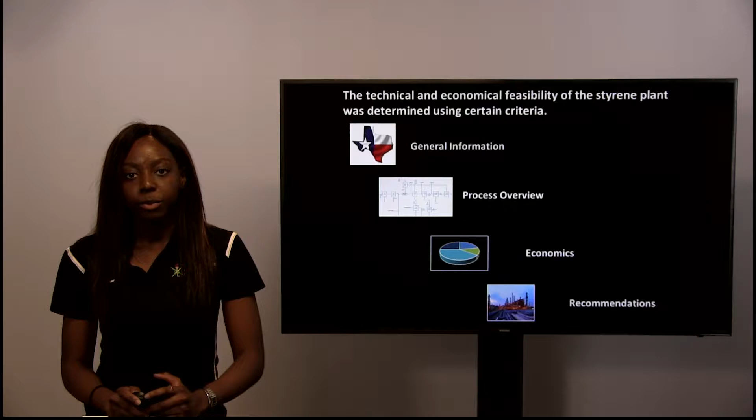They'll also cover a high-level overview of the production process, an economic analysis indicating the feasibility of the plant, and some recommendations about whether or not we should go forward with this project.

Our company, Knitline Chemicals, has 3 major locations across the United States. The first one is in Philadelphia, Pennsylvania. The second one is in University Park, Pennsylvania, which is actually the R&D facility that my team and I have been working from to develop the styrene plant for the final location in Houston, Texas.

What is great about this Houston, Texas facility is that it has access to many pipelines to supply raw materials and also to possibly transport some of our products.

In addition to this, the Houston facility would also be producing C4s as a major byproduct from another process.

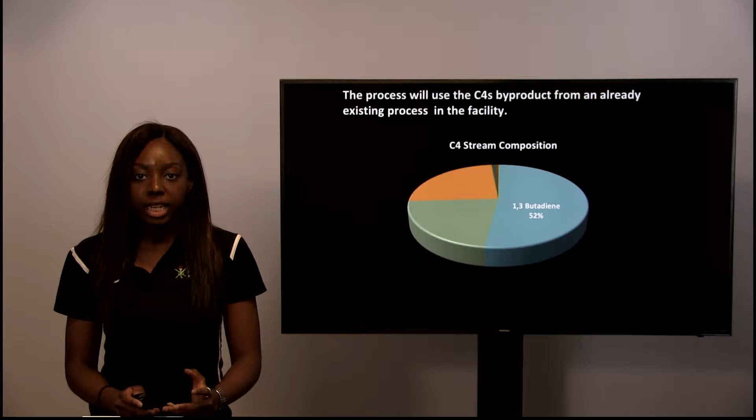This C4s is composed of over 52% 1,3-butadiene, which is essentially the major raw material for our styrene process.

Now, based on our calculations and designs that my teammates would discuss further, our plant will produce styrene at a capacity of 974 million pounds per year.

This would have a purity of 99.9%, which exceeds the market demands of 99.8%.

We will also be producing benzoic acid as a byproduct at a capacity of 26 million pounds per year. This can be sold in the market at 63 cents per pound.

Another of our byproducts would be fuel gas, which will be produced at 1,421 million pounds per year and will also be sold in the market.

Our final byproduct would be fuel oil. However, this byproduct would not be sold in the market, but it will instead be used as a utility to heat other processes in the plant.

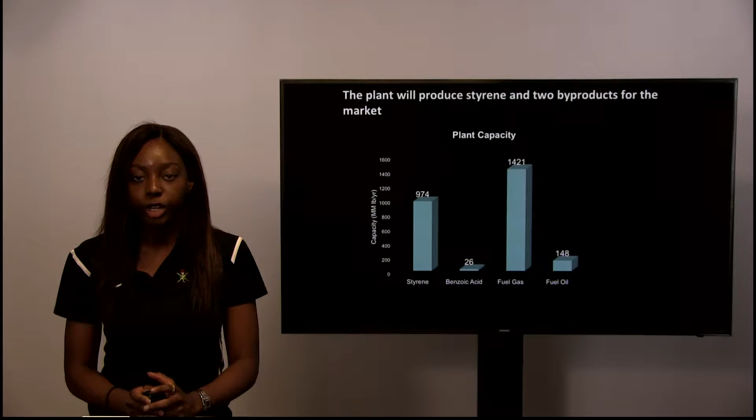For benzoic acid, we will be able to produce it at 99.7% purity, which meets the hard spec for that product as well, so this can be sold as a secondary product along with styrene.

Other hard specs we met were safety related. The first being the oxygen purity in our process was kept below 60% of the flammability limit, which meets the company standard.

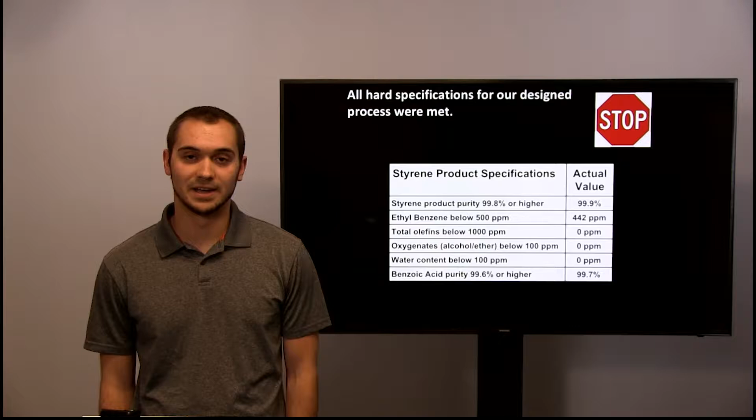The styrene product storage unit was also kept below 50 degrees Fahrenheit to avoid any kind of exothermic polymerization reactions.

There were 3 main soft specs that we did not meet with our design. Each one that we didn't meet was directly related to the waste streams in our process.

The overall selectivity of the process and the waste of VCHX and styrene did not meet the spec because of the high percentage of those compounds in the waste streams.

Ethylbenzene and styrene are 2 chemicals that are very difficult to separate, so in order to meet the hard spec of 500 ppm of ethylbenzene and the product purity of styrene, a pretty significant loss of styrene was incurred on the styrene purification towers.

Also, the production of byproducts such as benzoic acid and ethylbenzene takes away from the overall conversion to styrene.

Another soft spec that we didn't meet was the overall energy usage of our distillation columns.

The water purification tower that we had in our process uses 11,000 BTUs per pound of styrene product to run. This tower was needed in order to purify the water to avoid cooling water costs as well as wastewater treatment costs.

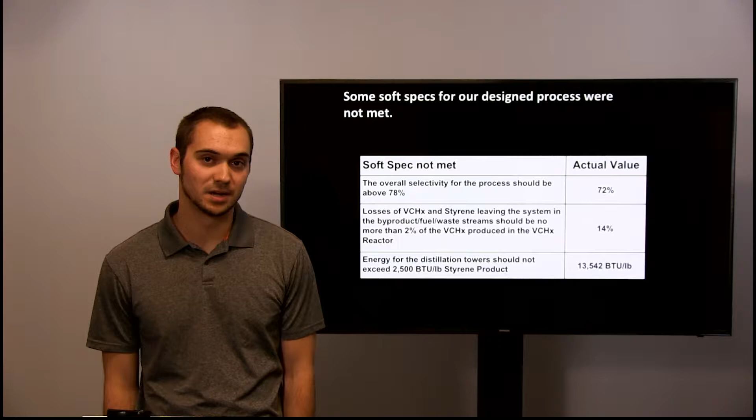For the environmental impact of our process, we considered 4 main waste streams: fuel oil, fuel gas, low BTU value flare gas, and water vapor.

The fuel oil is just a very flammable liquid at atmospheric conditions that we completely burned in all of our reboilers. The fuel gas was also used for fuel, but also sold as a major part of our revenue.

The flare gas was combined with excess process oxygen to make sure that the contaminants were completely combusted in the flare.

Overall, our process should not have a very large impact on the environment.

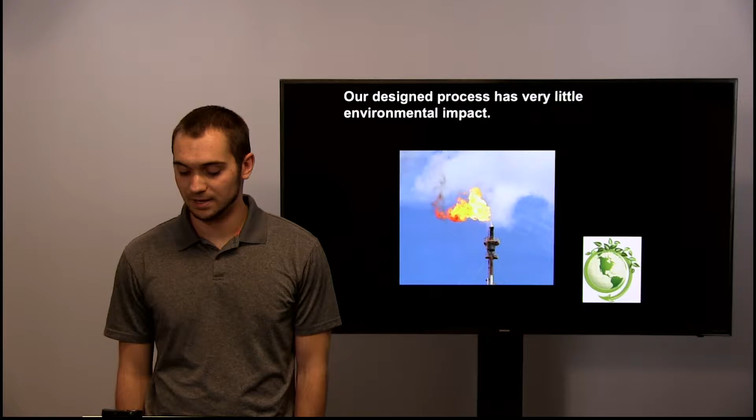Here you can see the first reactor takes the 1,3-butadiene and converts it into vinyl cyclohexene, or VCHX.

From there, the VCHX is purified using 2 columns, and then that VCHX is fed into the second reactor to create the styrene product.

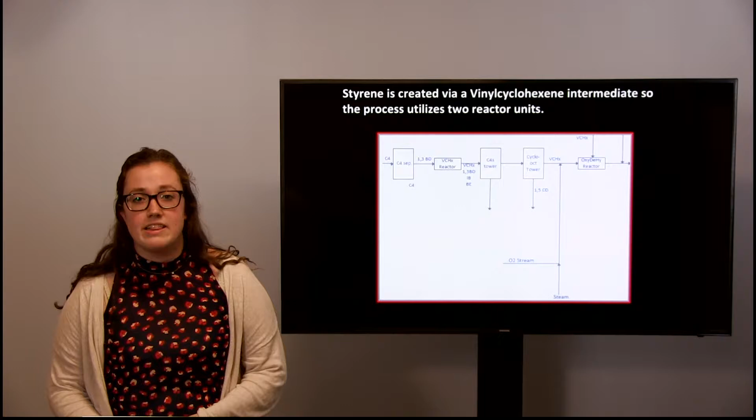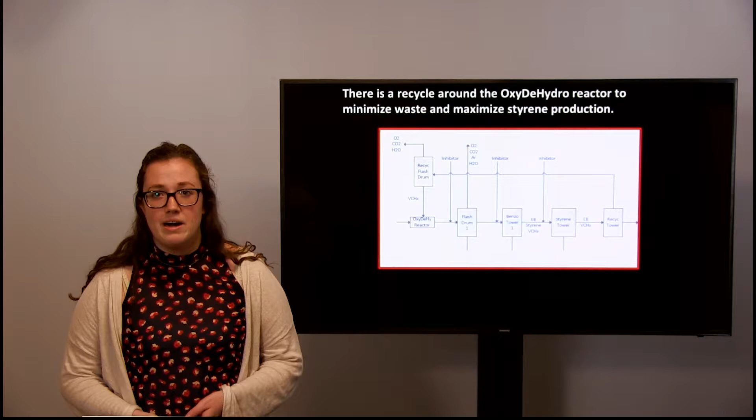The next area I'm going to highlight is the recycle around the second reactor. Here you can see there's a series of towers and a flash drum after the second reactor, and the final tower in this series purifies the VCHX to the point that it can be fed into a flash drum, purifies it more, and then it is fed into the second reactor. This allows us to significantly increase our production of styrene by nearly 9,000 pounds per hour.

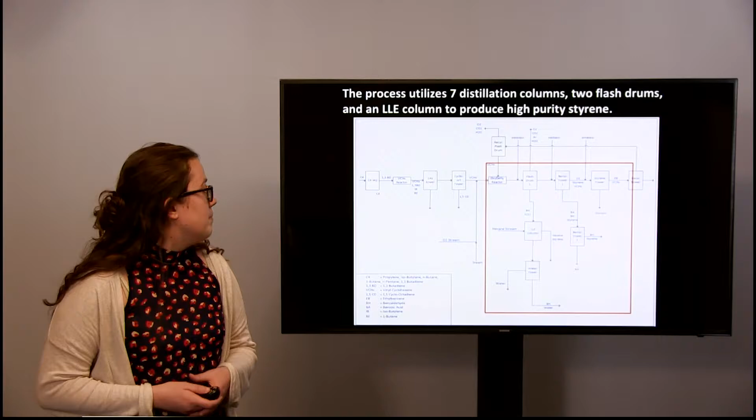Finally, the last section I'm going to highlight is the bottom half of the BFD. This allows us to purify our water stream to the point where it can be vented into the atmosphere, which greatly reduces our operating cost. This is done by using the LLE column seen and the distillation column labeled water tower.

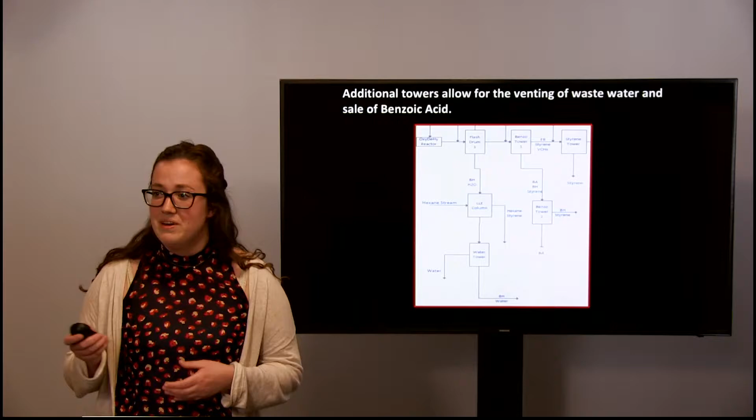And finally, you can see on this slide benzo towers 1 and 2. This allows us to purify benzoic acid to the point that it is pure enough to sell as an additional product. And now I'm going to pass it off to Margot to talk about economics.

The total capital cost of our plant is $457.75 million. These costs are split between the OBL, IBL, package distillation, and miscellaneous costs. Miscellaneous costs are comprised of things such as spare parts, team costs, contingency, etc.

What you're seeing here is basically a pie chart that shows the different distributions of costs between our different contributions. So the largest, obviously, is our package distillation, which was about 56%. This was greater than all 3 of the other categories combined. That shows that we have a pretty large cost with our package distillation, which wasn't something that could be neglected, because this could be something that we could end up designing, and that will be something that we will discuss later in our recommendations.

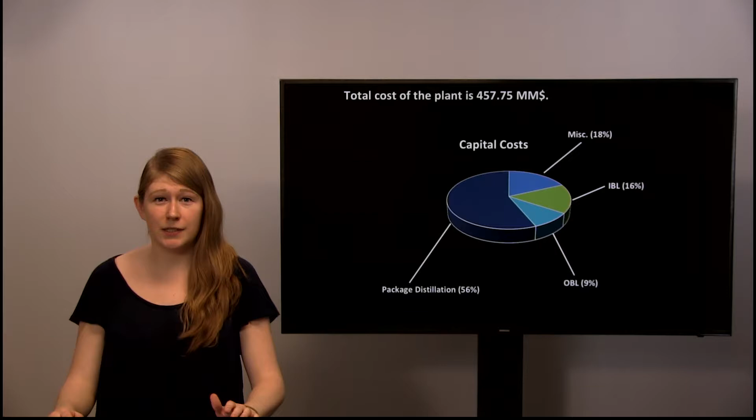Now I'm going to discuss in more detail the IBL and OBL costs. So the IBL costs for our plant, which consists of capital costs of equipment within battery limit, were $74.08 million. Much of the cost came from distillation towers.

As you can see in this pie chart, this is the largest cost right there. The reason why this cost was so large was because we had a pretty high flow rate, and a lot of our towers needed to be heated to very high temperatures. So it just required our towers to be a little bit bigger, and that ended up increasing our capital costs. The next largest would be the reactors, and then finally followed by our water recycle. These costs won't really change too much because it's something we can't really change about our process.

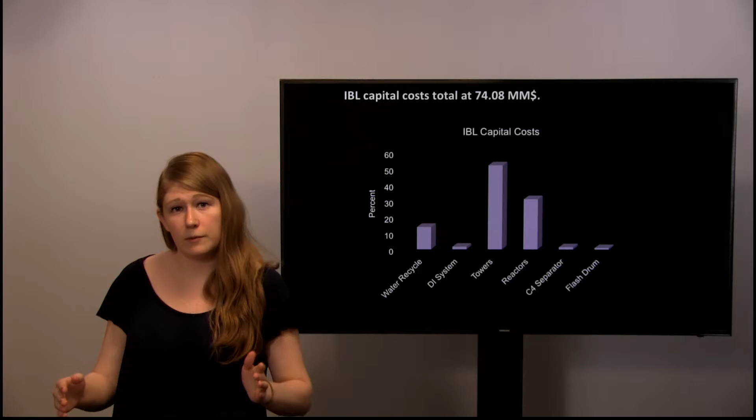So now that I've talked about IBL, I'm going to go a little bit further into the OBL costs. OBL generally includes product storage, utilities, and site development. These are capital costs of things that are outside the battery limit.

So the OBL cost for our plant was $42.78 million. The biggest cost for our OBL, which you can see on this pie chart, was our cooling water system, otherwise labeled a CT upgrade. The reason why this cost is so large is because we're using a ton of water throughout our plant to cool down a lot of streams. It's used in most of our heat exchangers, so it ended up being a pretty large cost.

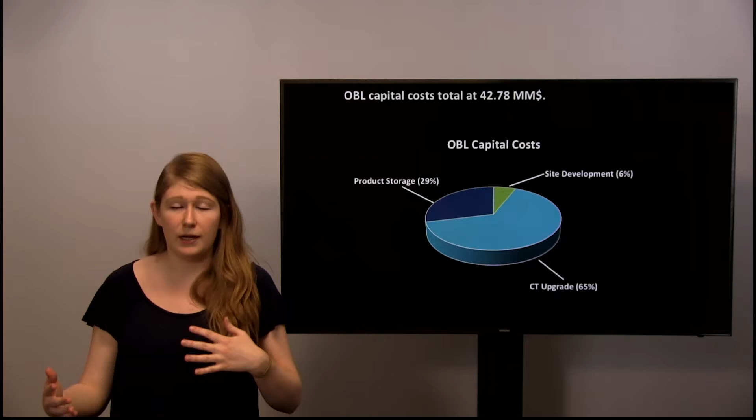The following largest would be our product storage, and this one is also fairly large because we have a pretty large flow rate of styrene that we need to send out to the OBL and end up storing. So now that I've talked a little bit about capital costs, I'm going to go into the costs that we have to pay all the time, which are our ongoing costs for our plant to operate properly.

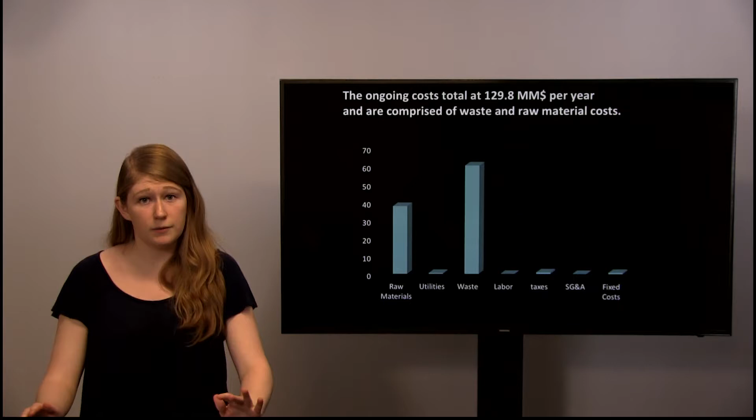Our ongoing costs include things such as waste, labor, raw materials, utilities, taxes, and other features which support the operation of the plant. Currently our waste and our raw materials are the highest contributors to our ongoing costs. The waste cost was around 60% and the raw material was around 38%.

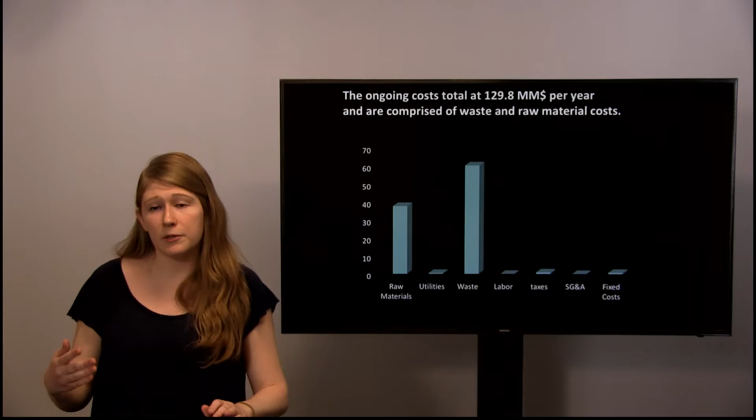Unfortunately, when we submitted our documents, there was actually an error in our calculation where our wastewater was entered in per year rather than per hour, so it ended up giving us this really large waste cost. So the next slide that I'm going to show is the corrected cost. Basically what we did was we corrected that per year into a per hour, and so I'm going to show what those costs are now.

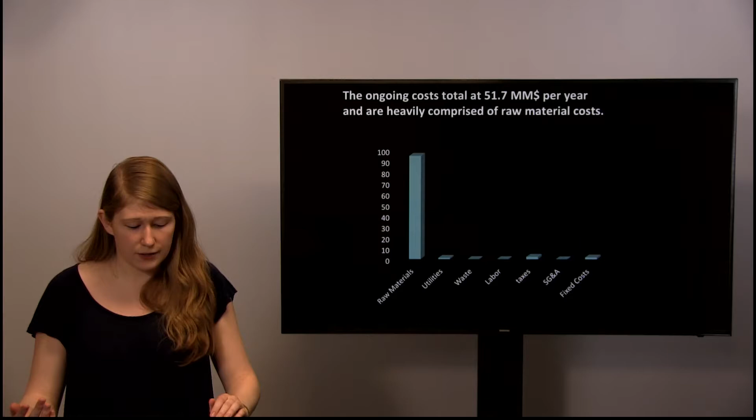Our ongoing costs are more likely around $51.7 million per year, and it's basically due to our raw material costs. It's followed by our fixed costs and taxes, but they're pretty negligible compared to the raw material costs, which you can see up on the board.

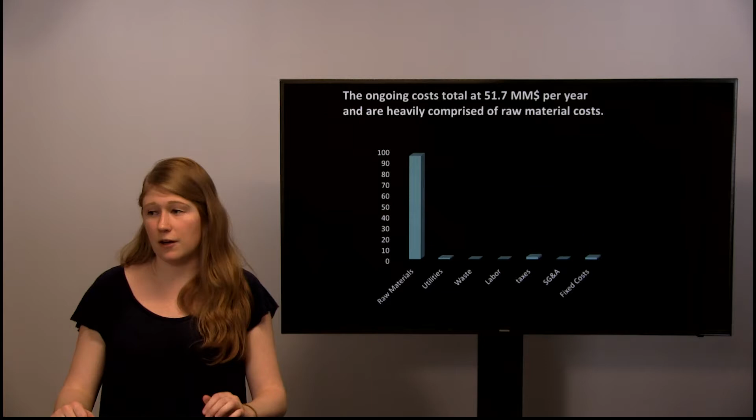From now on, whenever we mention our original design, that refers to the original documentations that were submitted and the original calculations. Any 'corrected' refers to when we fixed that calculation error. Now I'm going to hand it off to Paul, who's going to talk more about our cash flows and ATROR.

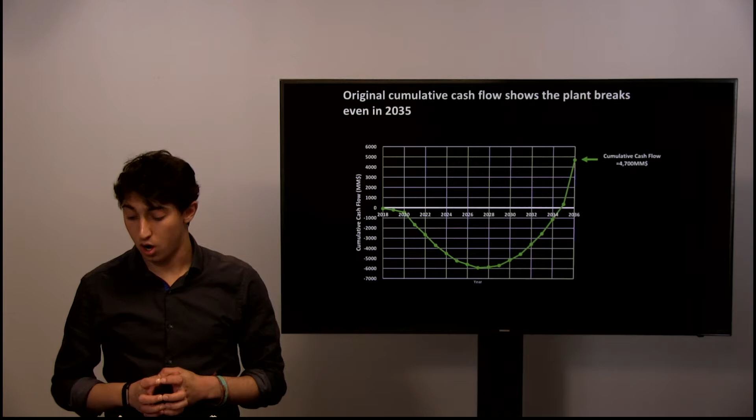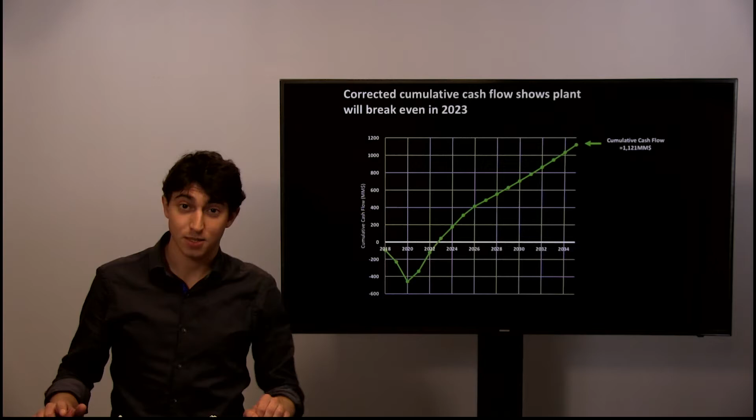Moving on to our ATROR and our original and corrected present worth. We originally calculated our ATROR to be 5.3%, which is much below the 20% ATROR that competing projects Nitline Chemicals is considering are currently at. And we expected to have a negative present worth of around $1.5 billion.

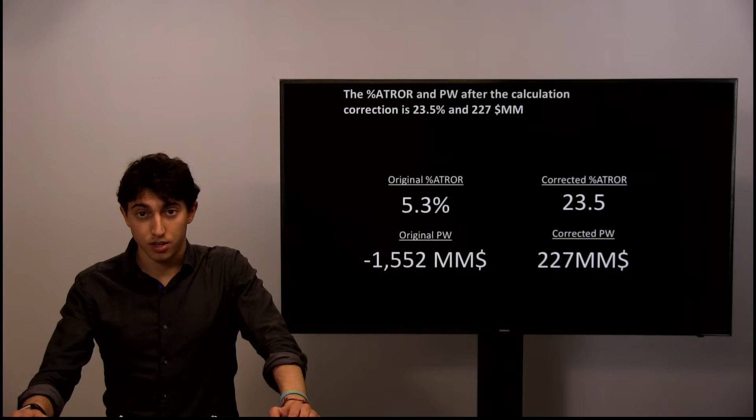After our correction, we were happy to see that we were above the 20% by around 3.5% for our ATROR, and that our corrected present worth is actually $227 million.

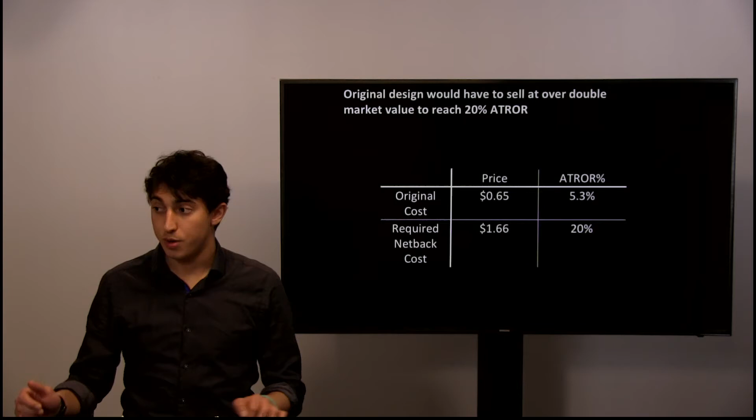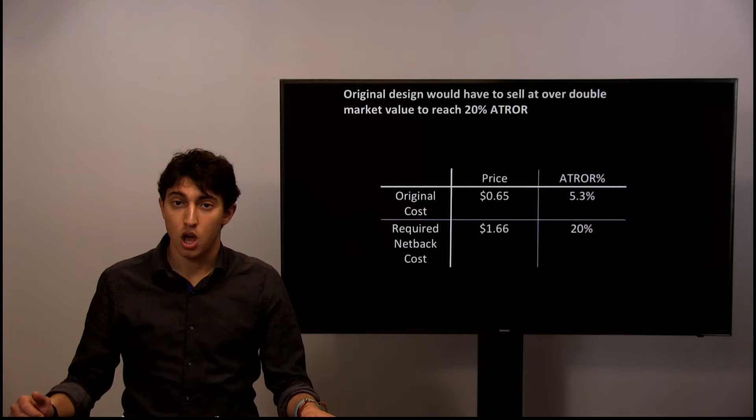Looking at our required netback cost, originally we would have had to sell our styrene for over double the market value in order to reach the 20% ATROR that would compete with the other projects Nitline Chemicals was considering. But after the correction, we found that we could actually sell it for 2 cents less than market value and still be at 21% ATROR.

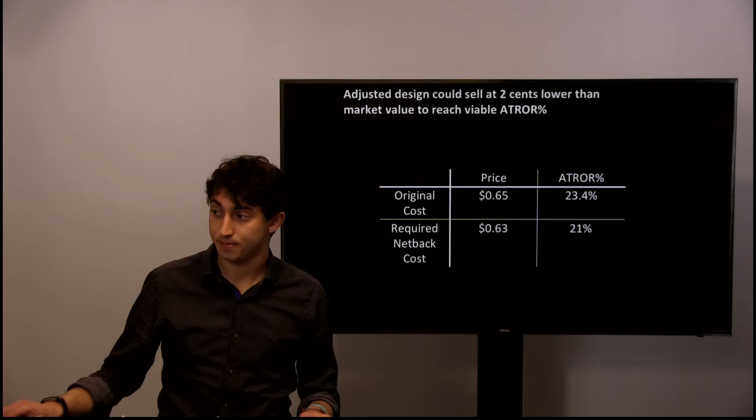Now I'm going to send it over to Isaac, who's going to wrap up with our recommendations.

For overall recommendations of the plant design, we evaluated the plant at our original values and our corrected values. Looking at our ATROR for the originally calculated values that were miscalculated, we got a 5.3% ATROR, but with our corrected values we got a 23.4% ATROR, which is above the 20% specification needed.

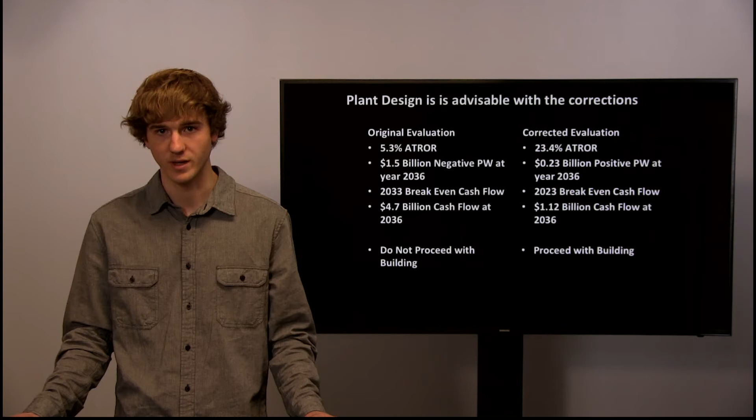Along with this, as well as the $0.23 billion positive present worth at year 2036, the break-even cash flow point at 2023, and the $1.12 billion cash flow at year 2036, which is the end of our evaluation—because we evaluated the years from 2018 to 2036—we recommend that you proceed with the designing and building of the chemical plant for 1,3-butadiene to styrene.

Along with that, we also have other recommendations for how to make the process a little bit more feasible, if we're going to do it again, or just other things to expand on in the future. The first one is putting heat exchangers before the distillation columns.

We found that the reflux ratio will be a lot lower if you put those heat exchangers beforehand, and this reduces the energy needed for the distillation columns, which will in turn create a lower cost for utilities. We also found that a high percentage of our costs, not only capital but operating, were due to the package distillation that we were purchasing and using.

So if we were to model that and design it ourselves, yes, we would have more distillation columns and things like that to separate the crude C4s into the 1,3-butadiene to go into reactor 1, but we think there might be an option to design that a little bit cheaper than what we're paying for it currently.

Another option would be to consider vacuum distillation for the columns, especially when separating ethylbenzene and styrene. Vacuum distillation is common among different industries because it reduces the amount of polymerization for styrene in the column. Due to the column's high temperatures, you have a lot more styrene polymerization, whereas with vacuum distillation you can run the columns at lower temperatures and still get the same separation.